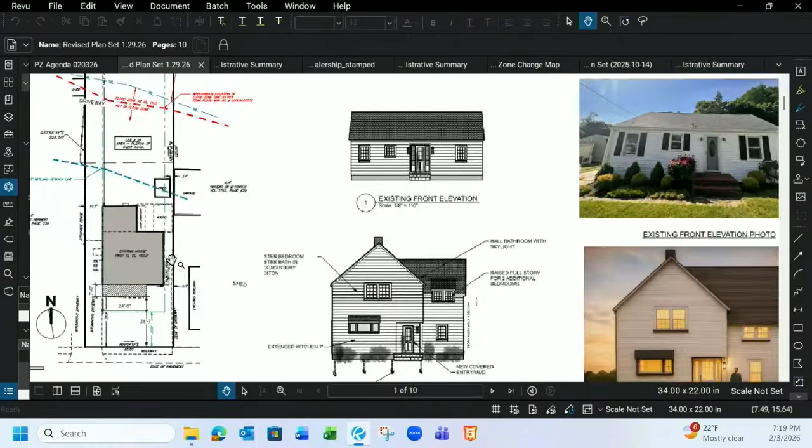So we're just looking for an extra couple square foot to account for that. All the plans are within the setbacks. The additional footprint would be approximately 170 square foot, so well within the 200 limit. Wetlands area should not be affected whatsoever. We're in fact going the opposite direction towards the front. The wetlands are in the back of the home. And yeah, we'd be more than happy to answer any questions.

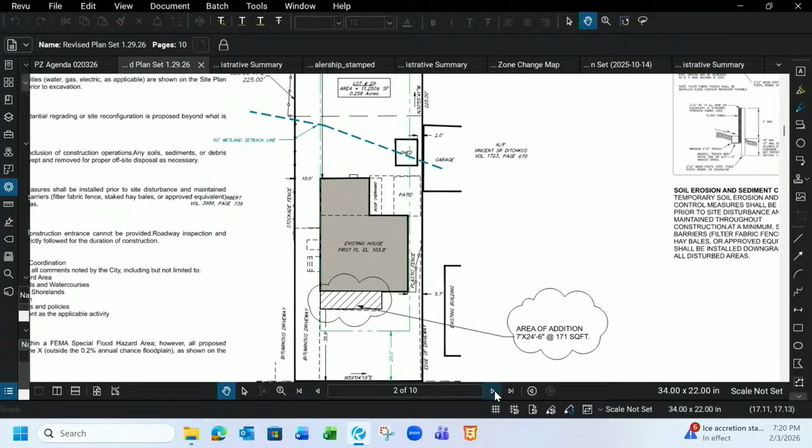Thank you. Are there any questions from the board? David?

The applicant is proposing a second-floor addition with a minor rear addition to an existing house. The proposed improvements triggered the need for a CAM review. The proposed height is 26 feet. The city engineer requires some clarifications for consistency with the CAM application, which can be made a condition of approval. No adverse impacts to coastal resources are anticipated. The project is zoning compliant.

Thank you. Any further questions from the board? Seeing none, I'd hear a motion. Mr. Chair, regarding 994 East Broadway as Zone R75, I move to approve with the conditions I will elucidate in a moment. The petition of Elijah Whitmore for a coastal area site plan review for a single-family dwelling on map 035, block 442, parcel 8A, of which Elijah Whitmore is the owner. The condition will be the applicant shall update the plans to satisfaction of the city engineer in accordance with the January 2026 letter of Mr. Bidlusky and limited, including but not limited to recommendations A through G in that letter.

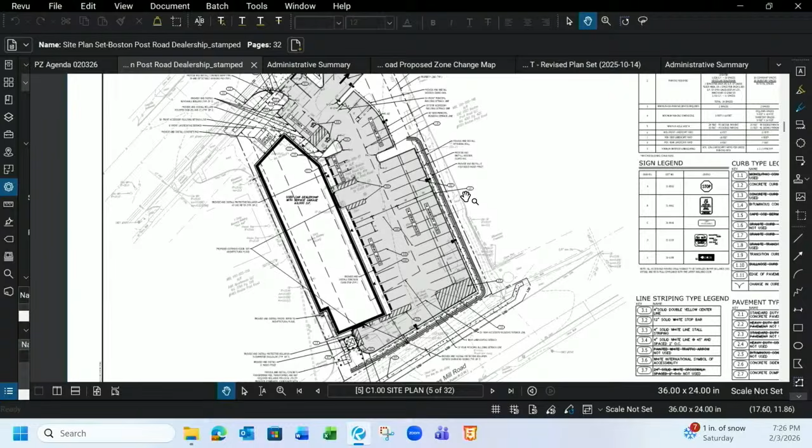Moving on to proposed, we do have the proposed plan up on the screen. The big item of note here is the proposed building is located to match the existing footprint of that existing building, matching on pretty much all sides. We made a couple minor tweaks to tighten it up a little bit, but it matches the outer extents on five sides, because there's one angled wall there.

The front setback for zoning is required as 50 feet; we match the 29 feet that the existing building had. The side requirement is 50 feet—on the west side, we match the existing, which was approximately 2 feet at the tightest, and it does taper a little bit. To the rear, the requirement is 25 feet; we're matching the existing of 31 feet.

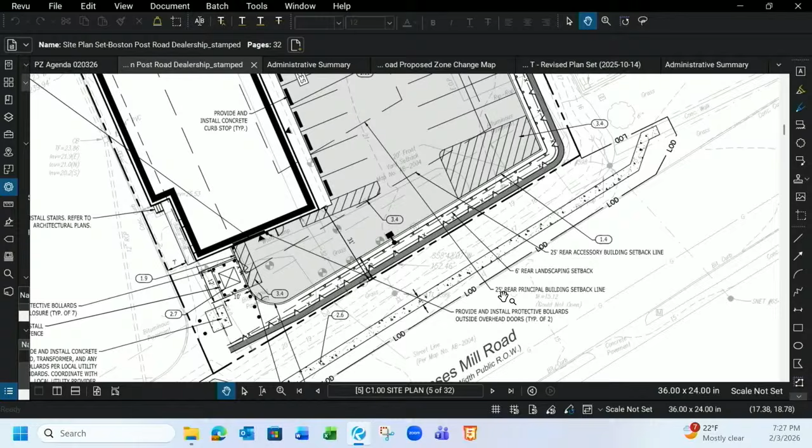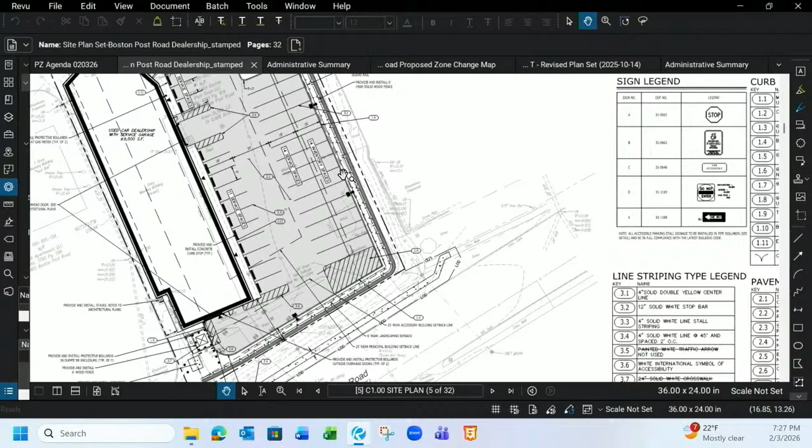For parking setbacks, we comply with the regulations on the front—required is 6, we're proposing 11, pulling that paving back a little bit. On the eastern side, the requirement is 10 feet; we're proposing to match the existing condition of 4 feet. On the rear, the requirement is 6 feet; we're proposing 7, getting a little bit of extra green space there.

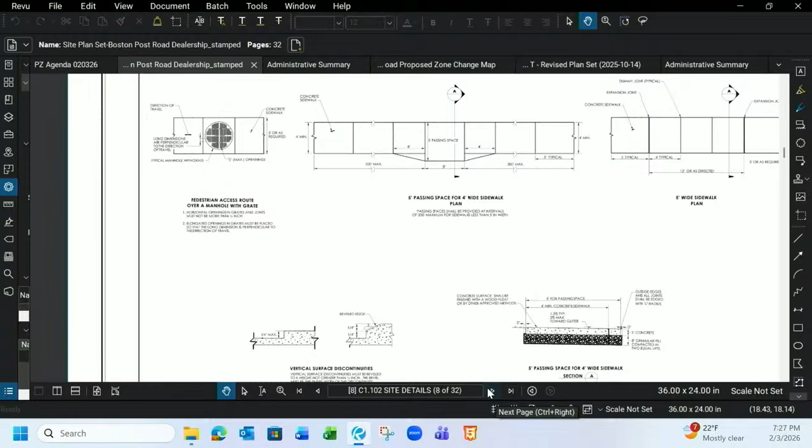The proposed building area is approximately 9,300 square feet. Roughly a quarter to a third of that will be dedicated towards office space to support the dealership function, the sales and business office piece. The remaining roughly 6,500 square feet or so will be dedicated to the service component of the building, with a total of 8 service bays expected.

For proposed parking, we are required to have 39 spaces by the regulations. We are proposing 39 customer spaces—public spaces to service the business between customers, employees, and that nature. That does include the required 2 ADA spaces as well.

We are proposing an additional 19 spaces for car inventory. Those spaces are slightly undersized at 2 feet shorter in the stall length, but they're inventory spaces. We understand that is something that has been done before in town at other dealerships, where inventory spaces are slightly undersized in some cases.

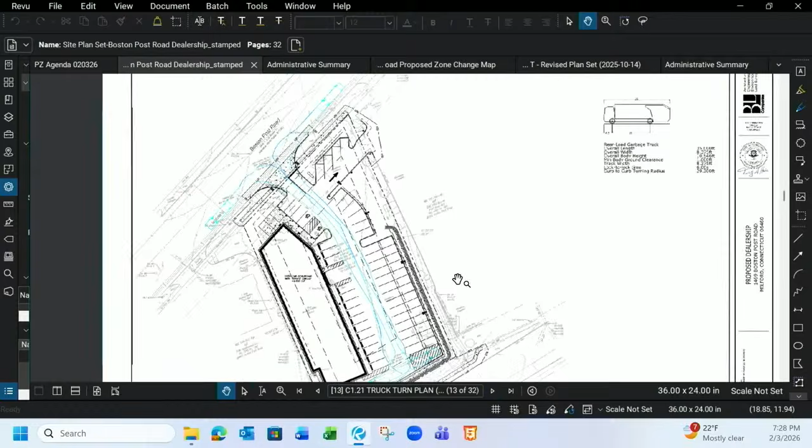For other improvements on the site, this property has no street sidewalks on the front or rear side. Both properties on either side have sidewalks on both sides. We are proposing to connect that gap and fill it in, both on the Boston Post Road side and the Rose's Mill side.

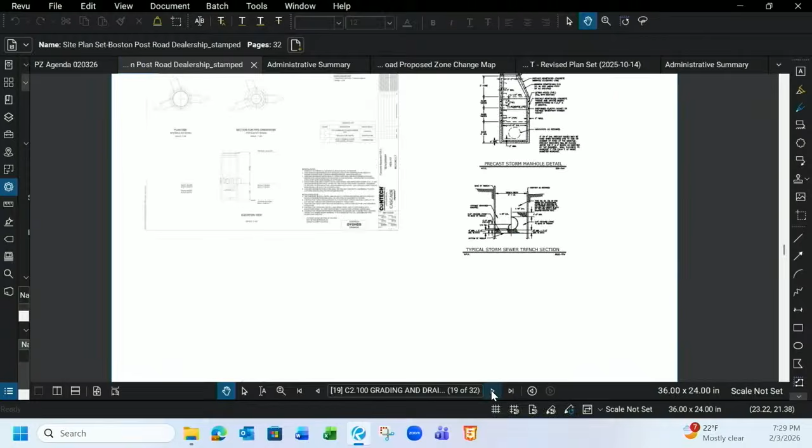We are proposing a number of new utility connections—pretty much everything coming in is going to be largely new services. This includes a new ductile iron water service for domestic use, a new fire service along with a new hydrant located at the new driveway upon the request of the fire department, a new 8-inch sanitary sewer service with oil water separator to provide treatment for floor drains expected inside the building, and new gas coming off of Boston Post Road. All those services—water, sewer, gas, and fire—are coming off Boston Post.

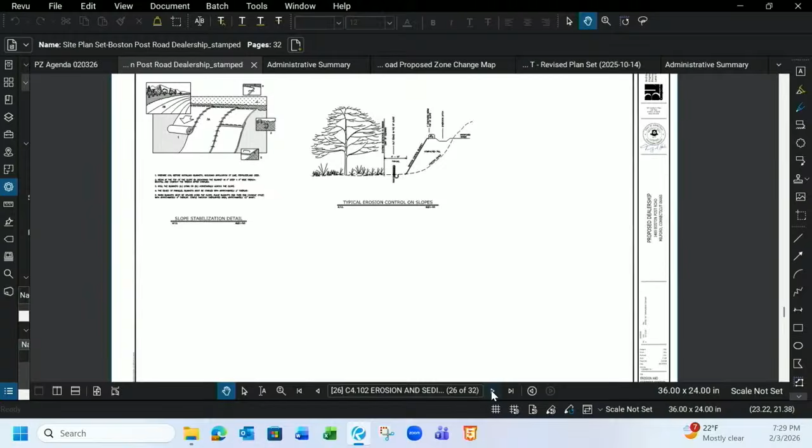Electric and tel data will be new, coming off of the Rose's Mill side of the site in the southwest corner.

For stormwater, we are proposing a comprehensive stormwater management system on site. There is no formal stormwater treatment today, so everything we're proposing is a significant improvement, but the proposed design does comply with the latest Connecticut stormwater management guidelines. The system consists of a series of catch basins in the parking lot, which will capture and provide initial treatment before flowing through hydrodynamic separators for the bulk of the treatment, and then discharge to an underground infiltration system, which will provide storage and infiltration for the large volume of stormwater we expect on the site.

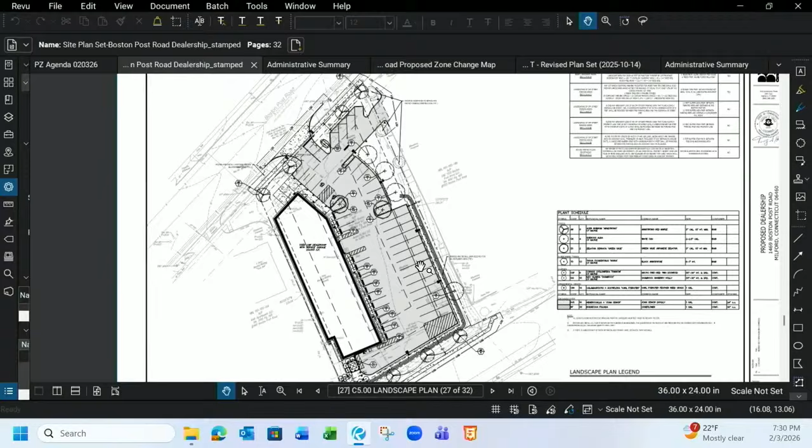In total, there were significant improvements in peak discharge rates for 4 out of the 5 points we analyzed. There's a reduction in excess of 50% of peak discharge, and the one that's lower than that is towards Boston Post Road, because we're adding the sidewalk. We were able to get a decrease there, but it's much smaller, in the order of a few percent, because of that added sidewalk. But again, it's a net reduction for the site as a whole for stormwater discharge.

We do also have a site lighting plan proposed. That was in the plan set. Maximum foot candles are roughly 4 on the site, so certainly not super bright, with very minimal to no spillage across property lines, around 0.1 foot candles.

And then finally, we do have a landscaping plan as well. The existing site is really devoid of vegetation. There's some grass, maybe a couple of shrubs here or there, but for the most part it's pretty bare. We are proposing a total of 14 large shade trees, 13 evergreens for some screening and variety, and about 21 shrubs, which we sprinkled around to try to spread them across the green strip across the frontage. There's some more green space and islands up in the northeast corner, and then more shrubs and trees along the Rose's Mill side, with some of the evergreens by the dumpster and transformer area to provide screening from that Rose's Mill side.

So in total, the proposed project includes redevelopment of what's currently a vacant lot that did experience a fire a number of years ago. The applicant is looking to redevelop that site and connect it with his existing operation next door at the Acura dealership. We are proposing a number of improvements with a reduction in impervious surfaces from existing, drastic improvements to stormwater management, and connecting the sidewalks on both frontages.

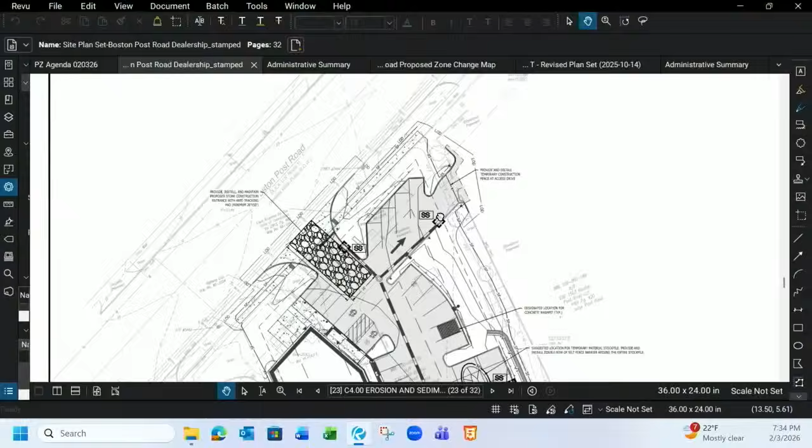I thought I heard you say Rose's Mill, but, so let's talk about the walkways.

I have no problem with the one on the Boston Post Road, but similar to the question I asked about the walls, do you have a site plan that would show where the sidewalks would be located? Yes, it's a little hard to see, but that zigzag where the mouse is going is the proposed sidewalk on the Rose's Mill side.

It does zigzag a bit closer to the curb line, but there's a grade change between this property and the street, so we have that zigzag for the elevation. Fine, thank you. The last question I have, and it's pertinent today, we wouldn't have asked this 3 or 4 years ago: where are you going to put the snow? If we get 15 inches, where are you going to put it given the apparent lack of any place to put snow on that property?

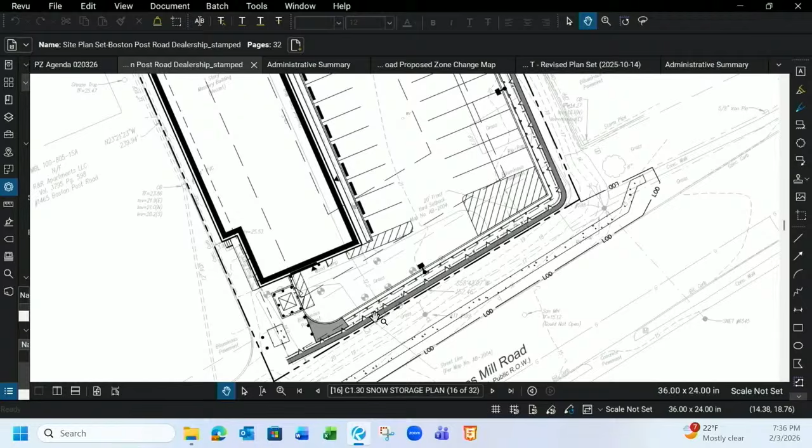Yes, it is a tighter property. We did provide a snow storage plan in the plan set, that's what's up on screen today. There are a couple areas where we can provide some snow storage. In the south corner there's very limited area - that hatched space in the southeast corner is primarily for delivery trucks or fire trucks for emergency access, so there might be a little snow storage there, but the primary areas will be more in the northeast corner of the site. Those darker shaded areas have some space for storage for smaller storms.

I'd also like to note we have 19 inventory or display parking spaces. In larger storm events, some of those could potentially be used for snow storage or short-term storage, but in large events like we just had, snow would need to be trucked off-site. Thank you very much. Thank you.

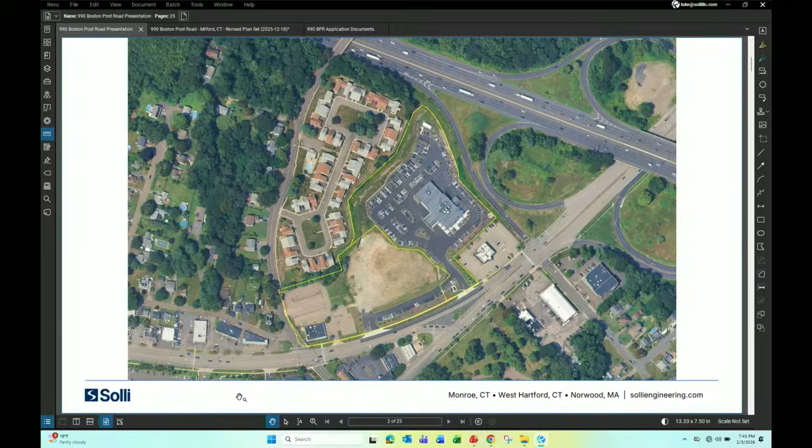The reason we're proposing this zone change is we're looking to form two separate legal parcels for purposes of financing with the bank and such. The Genesis is already developed, so they're trying to separate the funding between those pieces to make it easier for construction loans. So in order to make a complying lot, we needed to do the zone change and a lot line revision for that to occur.

However, in terms of the setbacks, it does conform to the bulk requirements for both zones for what it's worth - that would be for lot area, lot width, lot depth, front yard setback, building heights, building coverage, and FAR. So the real reason for the zone change is to take advantage of the reduction in the side yard setback for the interior lot line.

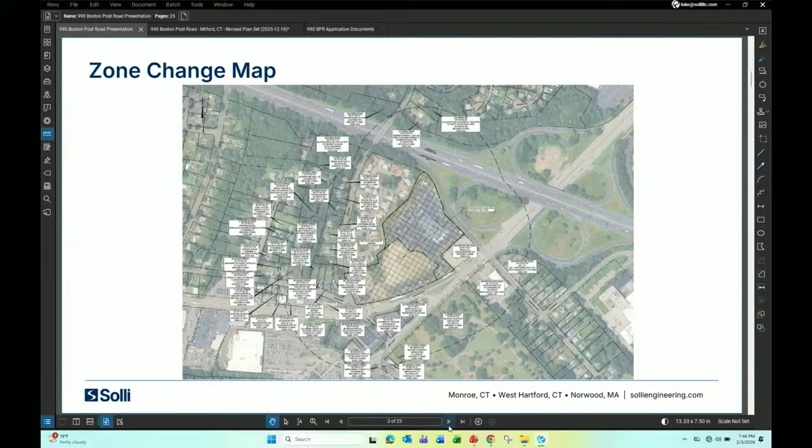Just proof that we posted the zone change signs as required. We also mailed out the abutters notifications to abutters within 500 feet, and we did file the applicable maps in the clerk's office per the zoning regulations.

So now to the lot line revision portion of the application. The proposed lot line - I'll try to depict this as easily as I can.

The existing lot line, where my mouse is, the grayed out area, separates 990 on the west from 1040 and 1052 on the east side. We're proposing to relocate that line about 200 feet to the east on the top, and it bows out to about 400 feet on the bottom.

The reasoning for the lot line relocation is so the Genesis can function as its own separate parcel, and the grocer and strip retail would also function as their own separate parcel. This would result in a compliant lot in terms of bulk setbacks, parking setbacks, and landscaping setbacks.

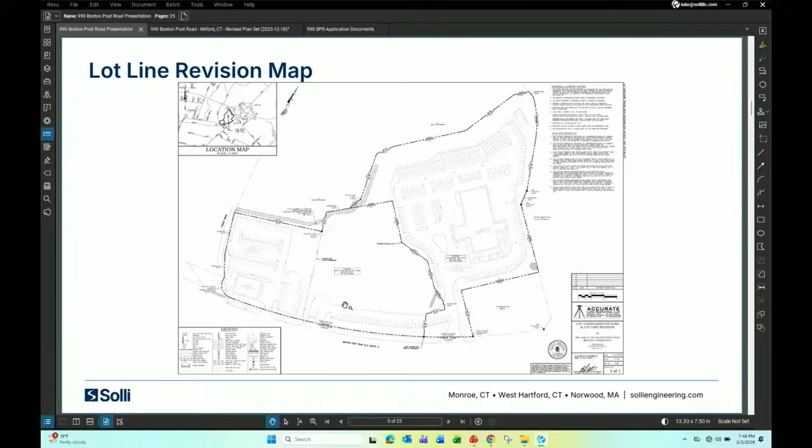For our overall site plan, the project consists of the construction of an 11,400 square foot strip retail building on the bottom left side. We envision it as a mix of probably 3 tenants, a restaurant and 2 retail tenants.

That'll replace the former Hooters building in the southwest corner. And then a standalone 26,181 square foot grocery building will be in the existing gravel parking lot, which used to be the old Howard Johnson's. The grocer will sit between the strip retail proposed on the west and the Genesis located on the east side. The site is in conformance with all bulk zoning and parking requirements.

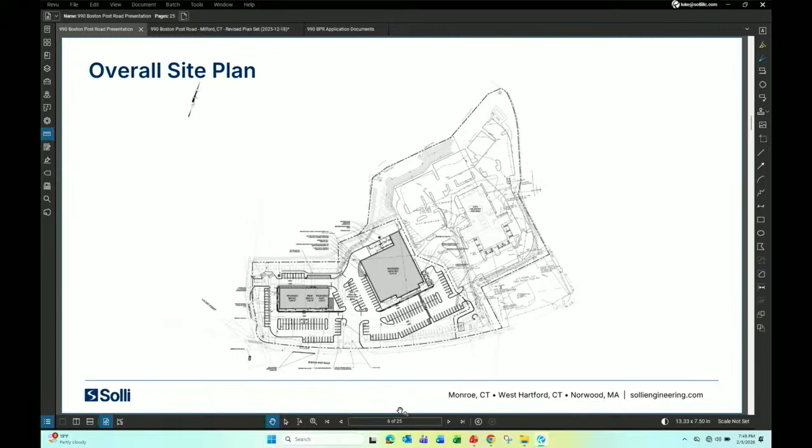It's a little easier to see with color here. In terms of site access, to orient everybody, this is the grocer in the middle, and the strip retail building on the left side. The existing right-in, right-out driveway associated with the Genesis dealership will remain as is.

The existing full movement driveway that splits the difference between these, running along the property line as it exists now, will remain as well. There was an existing curb cut here associated with the Hooters, which is covered up now. That's going to be removed for traffic safety reasons, to consolidate access and improve movements along Boston Post Road. The site access along Forest Road will be relocated about 40 feet to the north, so we can run a straight drive aisle behind the building.

All 3 building pads—the strip building, the grocer, and the Genesis—will have interconnectivity between them. There's a connection point between the grocer and the Genesis, and a connection throughout the middle of the property, so everyone will have access to the traffic signal at the intersection of Forest Road and Boston Post Road.

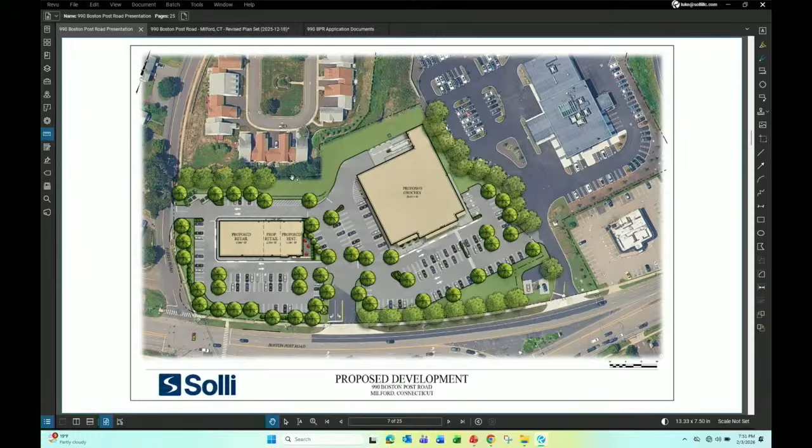Just for what it's worth, it might be a little easier to tell on my black and white site plan. The existing limits of the Hooters parking lot adjacent to the residential area to our north is about 10 feet off the property line right now. There's a screen fence and some large evergreens screening that. But as part of our proposed redevelopment, we're going to be relocating that parking lot 25 feet further south, further away from the residences that abut us to the north.

In addition, the parking lot is fairly high, with grades going up to about elevation 52. We're going to be lowering the whole parking lot between 3 to 10 feet below grade there. So not only are we tripling that buffer, we're also lowering the parking lot so it's sitting a good 15 to 20 feet lower. There'll be some walls with a screen fence on top as well. I do have a picture of the buffer as it exists today, and that's going to remain as part of the redevelopment.

The area shown here, exclusive of the Genesis dealership, requires 151 parking spaces per code, and we're proposing a total of 193 parking spaces, mostly because the tenant has their own requirements we need to fulfill for lease negotiations. It does meet the requirement for the total number of ADA accessible spaces, and there's also 20 EV-ready parking spaces, which is 10% of the total required by state code.

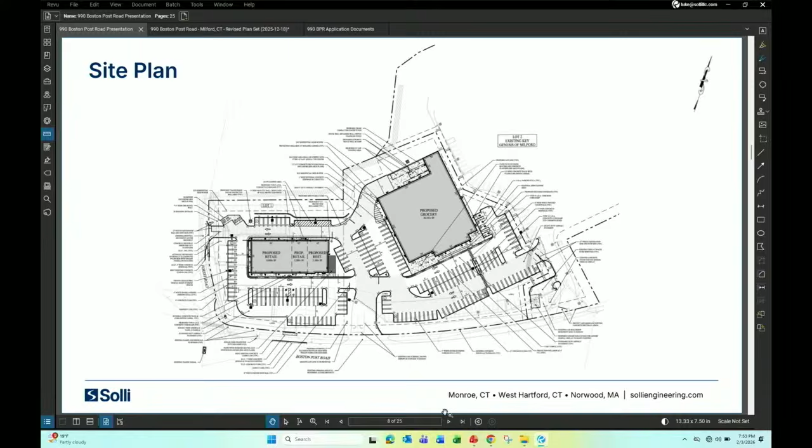We did submit a truck turning template. This is a view of the full-size tractor trailers entering the site. You can see they can come in safely off of Boston Post Road, proceed to the rear into the loading docks behind the building, and then they can proceed out through the access on Forest Road for the signal. They would also be able to exit via the driveway in the middle, but we figured likely they'd be using that signalized access that's over there.

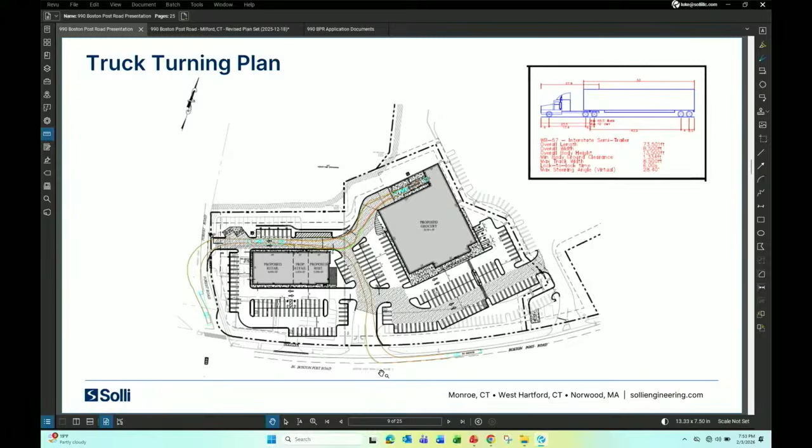We also submitted a fire truck turning template to the fire marshal for review as part of his response to the comments, and he did give us some fire lane signage, striping, and some circulation comments, but we were able to address that, and I believe we received a sign-off letter on January 13th from the fire marshal.

In terms of the grading and drainage, it was designed in compliance with local regulations, along with the 2024 Connecticut Stormwater Quality Manual, and also the 2000 Connecticut DOT Drainage Manual. We always design our projects to mimic existing drainage conditions as best as we can.

Generally speaking, runoff from all the impervious surfaces, that would be building roofs and the parking lots, will be collected by a series of catch basins and drainage pipes. All that runoff will be treated by hydrodynamic separators before flowing to one of 3 new underground detention systems before it outlets from the site.

More specifically, the west side of the development, which is where the strip retail building will be located, everything will be collected. There is a hydrodynamic separator right over here, flows to, if you could see this little grid, a series of underground detention chambers that'll reduce the amount of runoff leaving the site, and ultimately will connect into the system at the southwest corner of the property in Forest Road.

And then for the larger portion, the grocer, you could see 2 larger underground detention systems, one in front of the store, one on the side of the store. There's also a large one that was constructed under the parking lot. So there's going to be 3 underground detention systems collecting the runoff from the grocer portion of the project, attenuating and treating the water, attenuating the flows, and ultimately that flows off-site to Genesis and then to a drainage ditch along the highway.

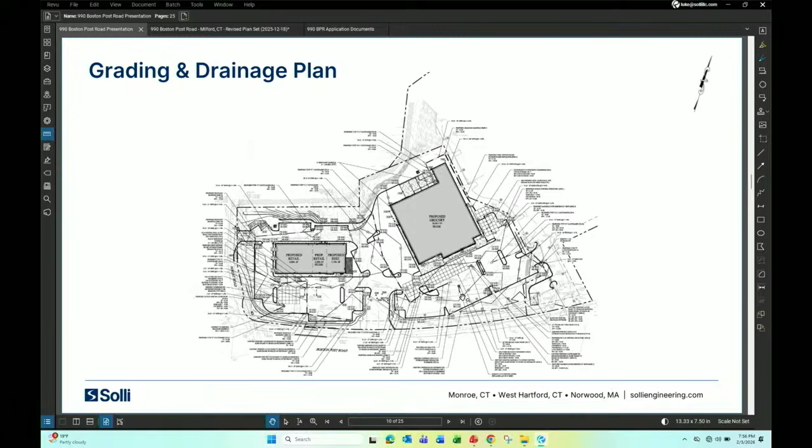There's a construction entrance proposed for construction-related traffic. There are stockpile areas, inlet protection proposed for the existing catch basins and ultimately the proposed catch basins as well, so that soils don't migrate into the system and off-site. And there'll be silt fence installed on the low areas of the excavation, again, so no soil migrates off the property.

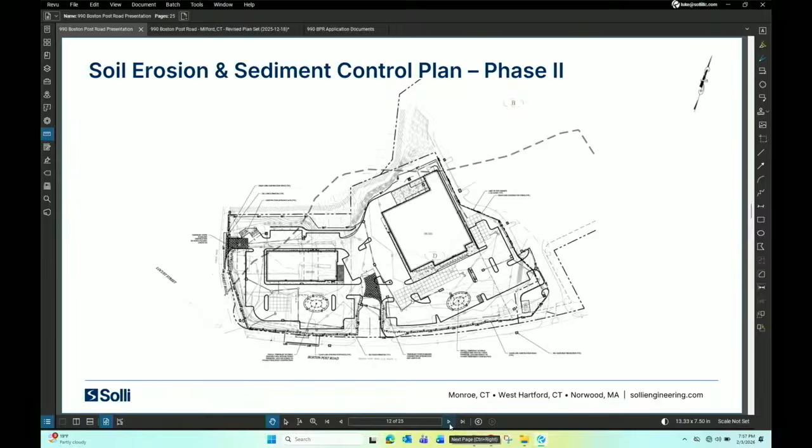Okay, utility plans. The site is serviced by public utilities under existing conditions. There will be separate services for water, sewer, gas, electric, and telecom for each of the buildings.

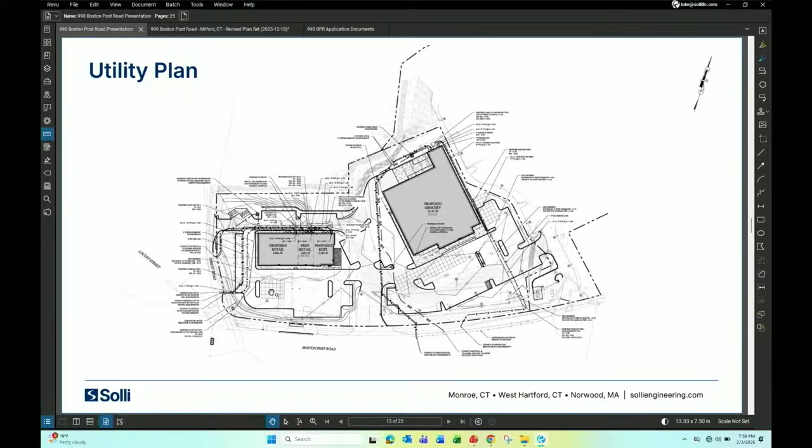We received an approval letter for our sewer flows from the Sewer Commission on December 17th, 2025. There is a bakery deli use associated with the grocer that'll flow through a grease trap to collect grease before it enters the sewer system downstream. The restaurant will also have its own separate 2,000-gallon grease trap for grease waste before combining with the on-site domestic sewer.

In terms of landscaping, we proposed a detailed landscaping plan. The goal is drought-resistant plantings to the greatest extent practical. 80% of the trees are native species, and no invasive species are proposed. The plan complies with regulations regarding the number of plants required, the internal square footage of landscaping, and buffer strips along the side and rear property lines.

For some of the steeper slopes we're grading out, we have a specialized erosion sediment control mix to stabilize those areas, and the remaining areas will be vegetated.

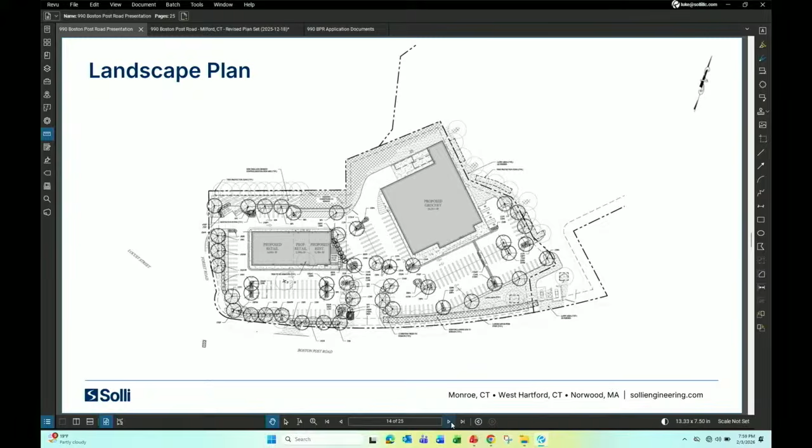So this is the buffer in question that is to remain, and I'll try to help everybody visualize it. This is the rear of the existing Hooters parking lot. You can see the approximate limits of pavement here where my mouse is, and we're going to be moving this limit of pavement about 25 feet to the south, somewhere in the middle of the existing drive aisle.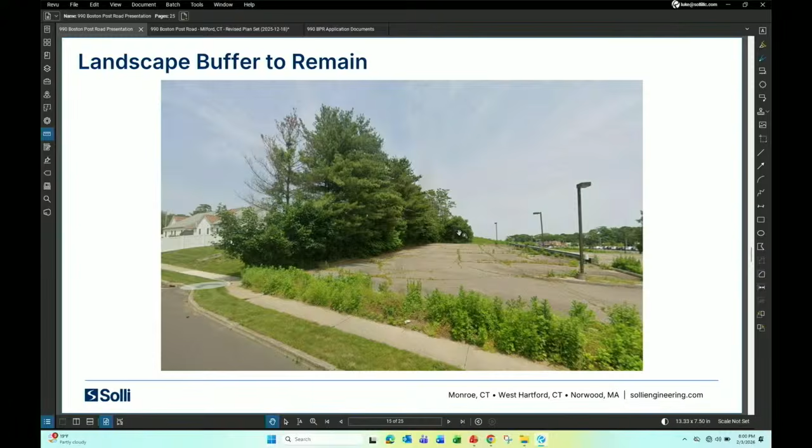Coming from the forefront of the page to the rear, you can see this drive aisle gets higher by about 10 feet as you travel east, but this will be reduced to be significantly lower than the condos located behind us. So the building and site should be naturally screened based on the grading plan and vegetated plantings, and the existing screen fence will also remain as part of the project.

In terms of lighting, we design all our sites with energy efficient LED site lighting fixtures, dark sky compliant. All fixtures are recessed, helping reduce glare and ensuring no light spillover over the property line. These poles are about 18 feet high, but since the parking lot is set so far below the residents to the north, the top of those poles will most likely be at or below eye level elevation compared to the residences above.

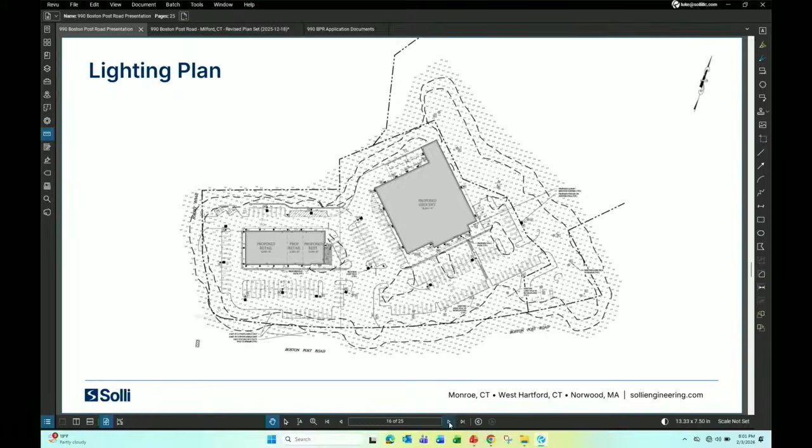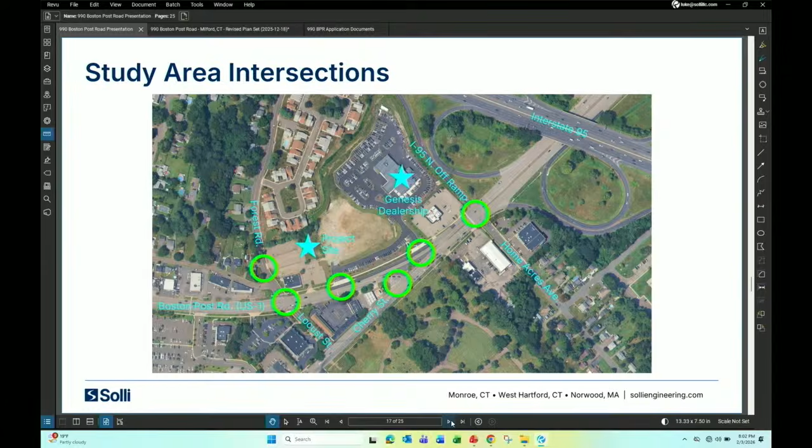We did the counts in April 2025 while school was in session, and projected those to the 2027 build year. We believe, if all goes well, the project should be open sometime next year, so we applied a 2% growth rate for natural increase in traffic along the corridor.

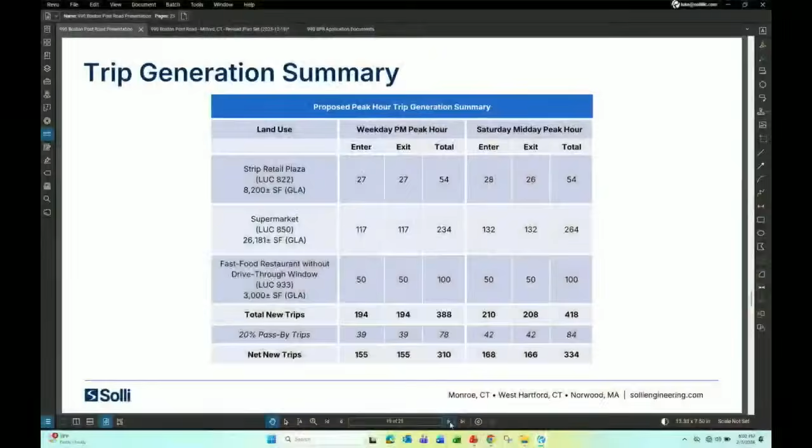We prepared a trip generation summary as part of our traffic study. In total, during the weekday evening peak hour, we expect about 310 new trips to the development—that's not 310 in and 310 out, that's 155 in and 155 out, based on the ITE manual. On Saturday, it's a bit larger, about 330 total trips in the peak hour, about 168 in and 166 out.

We ran a capacity analysis for the existing, no build, and build conditions. Overall, the intersections are going to maintain acceptable levels of service. Generally, any increasing delay is within 3 seconds or so, give or take, so not a very measurable impact on levels of service or delay at the intersections. In terms of car queues, most intersection approaches will only experience an increase of 1 to 2 vehicles, with maybe one location seeing an increase of 3 vehicle lengths or so.

The traffic study was reviewed and approved by the Police Commission on November 3rd, if my dates are correct. We also had to submit to OSTA, the Office of State Traffic Administration, because this development has over 200 parking spaces. OSTA review is ongoing—they completed the drainage portion but are still reviewing traffic. Since Route 1 is under state jurisdiction, they'll tell us if we need any mitigation or changes to the geometric layout. Subsequent to OSTA review, any physical work in the right-of-way requires an encroachment permit from the DOT District 3 office as well.

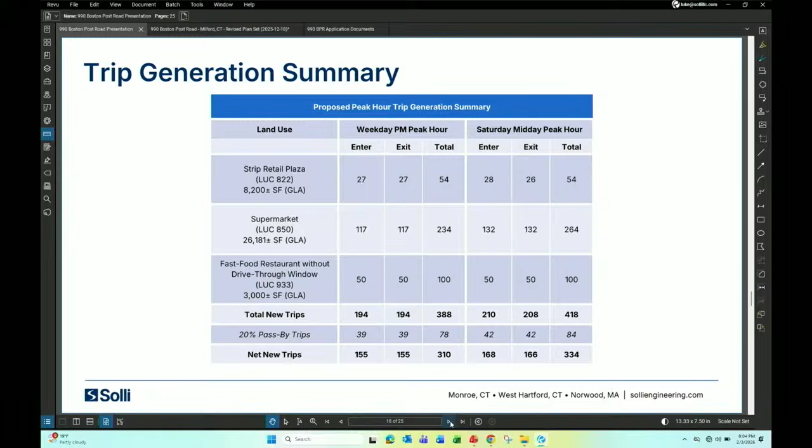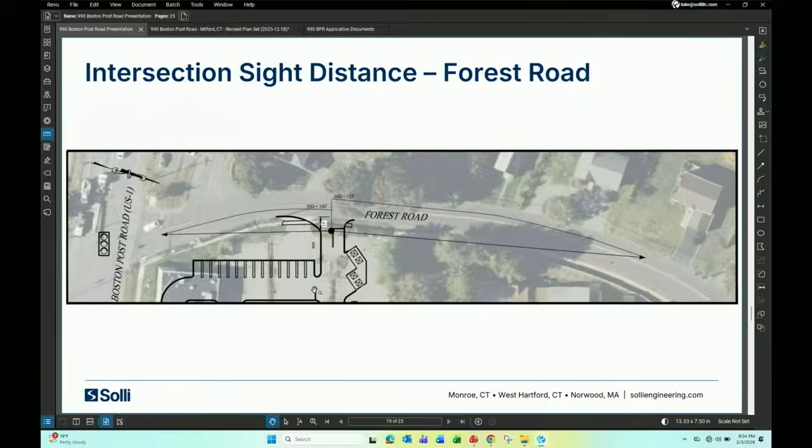Just quickly, in terms of intersection sight distance, here's a plan showing the required sight distances along Forest Road. Essentially, the driveway is in a similar location, but there is adequate sight distance for the driveway along Forest Road. And also, it's an existing condition, but for what it's worth, the site frontage along Boston Post Road is clear, and the sight distances are all contained basically within the pavement. So no issues with the sight distances, but again, they've been reviewed by the Police Commission, and they'll also be reviewed by OSTA as part of their review.

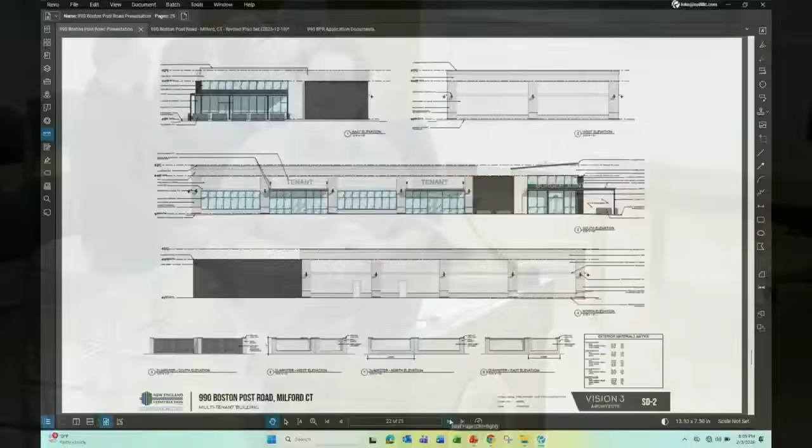Just a view of what the facades, we envision the facades to look like. Light color palette, mostly whites, light grays, a lot of windows along the front for natural light, but no windows or anything on the rear abutting what would be facing the residential, so there shouldn't be any light emanating from the building towards the residential development located behind us. And we also have a matching color scheme for our dumpster enclosures, shown on the bottom here.

Mr. Sulkus did have some initial comments about the materials to be used. You'd like to see more natural materials per your regs, so we've gone and updated the renderings. So what you see here are the updated renderings. A lot of brick veneer, fiber cement, lap siding. There's some metal siding over here on the east side, the east facade of the building, along where the proposed restaurant is located.

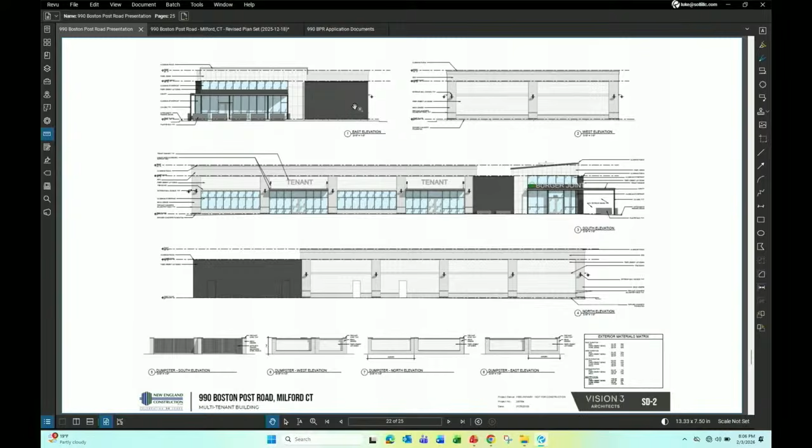Just quickly, floor plan for the proposed grocer. Again, 26,181 square feet, a single-story building. There is a small outdoor seating area. They have a little cafe, and we believe they'll have a cafe with some offerings. There'll be protection bollards in front of the store. You can see all these little dots down here, so there'll be vehicular protection for the front of the store.

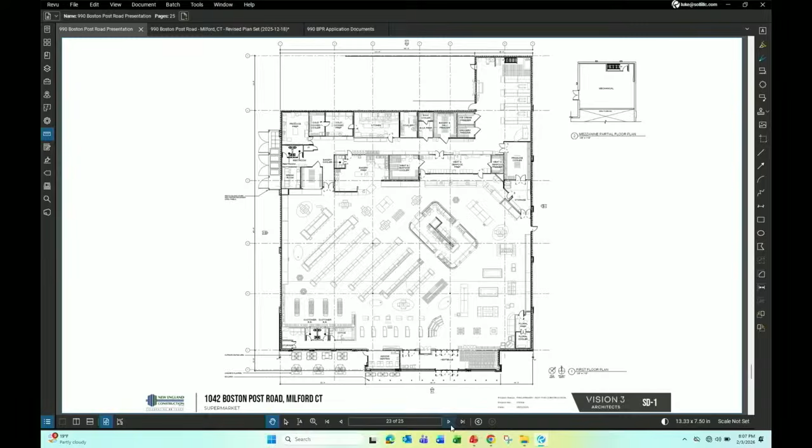And then the color scheme, another light gray, beige kind of color scheme along the sides and the rear of the building, and then the front of the building has a kind of a green logo facade, if you will. But again, a lot of windows to let natural light in along the front, but no windows proposed along the sides or the rear to prevent any light trespass to the neighbors to our north.

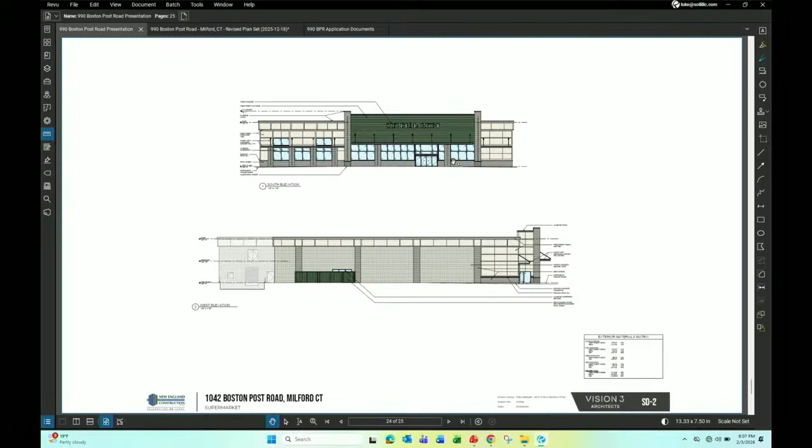So with that, I'm happy to answer any questions. I know it threw a lot at everybody, but happy to answer any questions.

Thank you. That was a very thorough and interesting presentation. Thank you for that. Mr. Anderson. Good evening, Mr. Morrow. Yes.

You answered a question I was going to ask you about the outdoor patio. I was wondering what that structure was on the east side of the retail.

For the grocer, how many bays will service the grocery store? Just one truck, in terms of a truck well? So the truck is backing into the space? Correct. Okay, 75 foot wide, and it's got a wall the whole length. Yep. And it is, for what it's worth, set, there's a cliff that's about 25 to 30 feet high behind us, so it's set a good 30 to 40 feet lower than the residential.

That's there's a buffer above us. There's a buffer, yep. Right, I am familiar with the site. Okay, could you, maybe I missed this, could you detail the landscaping plan? Sure.

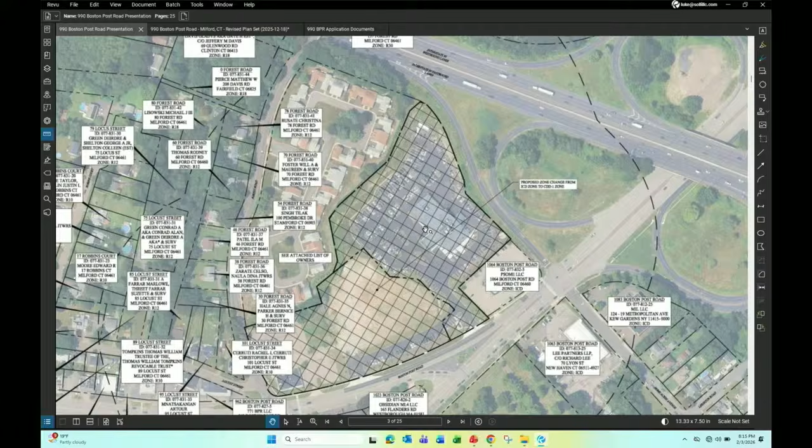Okay, why do you need the change for the Genesis property? Because it's already been developed. In order to allow for the lot split of the zones in terms of bank funding, there's a certain building and landscaping setback requirement which we cannot meet without a zone change. Essentially, without the zone change, the project isn't viable because we need a reduction in the side yard setback. Okay, and then the last question I have is on the lot line adjustment — does that apply to all three of the parcels or only 1040 and 1052? It applies to, I guess, two.

So this is 990, this square on the left side. Everything from, if you could trace my mouse, all the way over and then all the way up to the back, that's one property known as 1040 and 1052 Boston Post Road. So we would be relocating the existing property line so that 1052 is its own separate property, and then 990 and 1040 would be their own separate property.

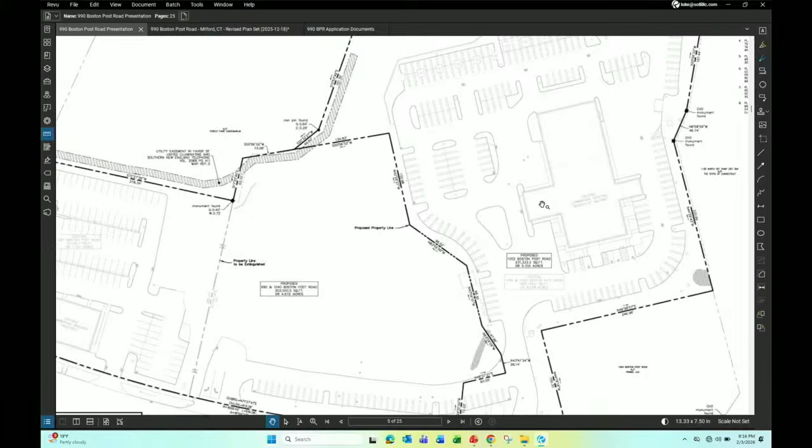Sorry, I imagine it was confusing to me too from the start. So it appears the lot line adjustment you're seeking is between 1040 and 1052. That's correct. I have no further questions at this point, Mr. Chair.

Thank you. Any questions before we go to David and then to open the public hearing? David?

The applicant is proposing to develop a shopping plaza consisting of a grocery store, restaurant, and retail space on the site of the former Hooters restaurant and an undeveloped portion of a property associated with the Genesis car dealership. The application consists of three parts. First, a proposed zone change from ICD to CDD1. The change allows for more advantageous setbacks, which improves site plan configurations.

Second, a lot line adjustment is proposed to allow for a better site plan layout and lot configuration where the proposed shopping plaza and Genesis dealer meet. The configuration keeps both lots zoning compliant. The third application is for the special permit under 3.16.2.14 for the development of the shopping center and restaurant use.

151 parking spaces are required, with the applicant providing 193, including 20 EV charging spots. The project as proposed is zoning compliant. Thank you.

Good, Mr. Sadi? Mr. Chair, through you to Mr. Sulkus. In your first page of the administrative summary form, you refer to the CDD1 and the language you use that allows for more advantageous setbacks, which improves site plan configurations. How does that make any difference to a property that's already been developed and we approved some time ago?

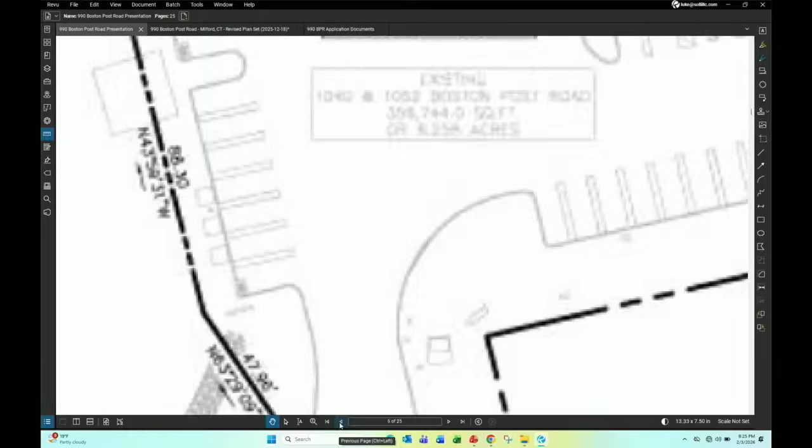Those are the 3 or 4 EV chargers that were mentioned. Those will remain as part of the development on the Genesis parcel. It's a little bit too blurry here, but hold on, I think I have a clearer version.

So these are the existing chargers here. We are going to, although not depicted here, likely put some EV chargers also along this strip here to feed off of. They're level 3 chargers, so the amount of draw they need requires its own transformer. As I understand from talking with Jeff Merriam, there's additional capacity.

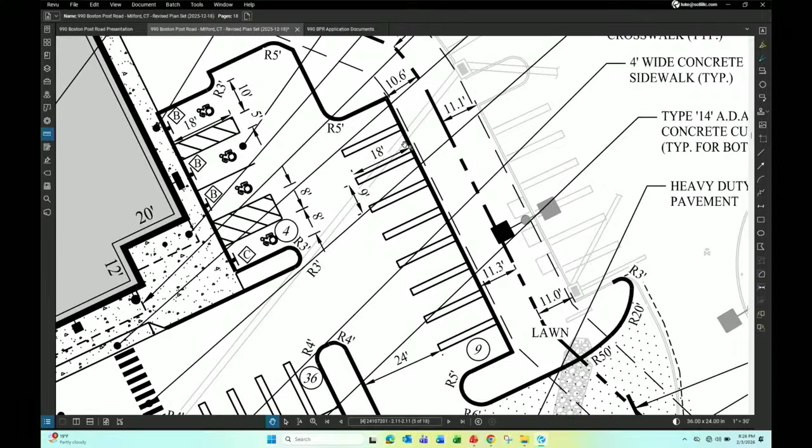So we're going to try to put some higher speed level 3 chargers, which I believe you can get a full charge in like a half an hour, something like that. As you can imagine, they're expensive. UI needs to have the infrastructure in place to also support that.

I got an email today. They're trying to help us coordinate to see what the loads might be. So while not set in stone, the goal is to try to get some more EV fast chargers on the adjacent, the opposite side of that landscaping island.

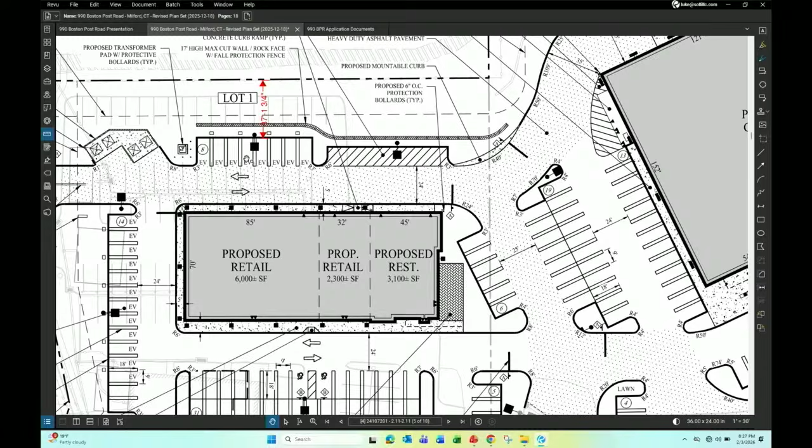And then also, there would be some EV parking spaces located along this side of the building and the rear of the building at the strip retail as well. So that should answer that.

In terms of solar panels, unfortunately not my decision, but I can certainly bring that recommendation back and see if it's something that would be viable. I'm not sure if the roof is already supported for those type of loads, but it's certainly something we can consider, and I can have a conversation with the landlord and the contractor about that.

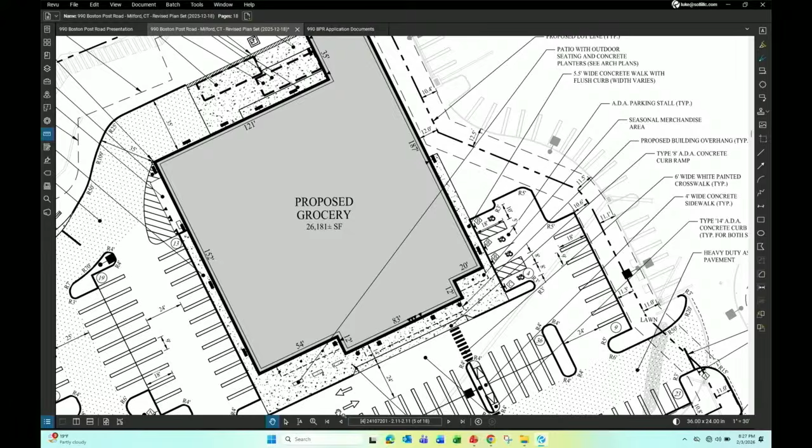In terms of the traffic that's located along Forest Road, with the full movement curb cut on Boston Post Road, there is the ability for cars using Genesis, the grocer, and the strip retail to have immediate access to Boston Post Road. One of the reasons we're proposing to maintain it in that configuration is so we don't have to force everybody out to Forest Road.

As a matter of the delivery vehicles for Genesis coming in and out, this is a right-in, right-out driveway, so in order for them to get back to the highway, they need to loop around and make the left turn out here as well. That's why we're proposing to leave that full movement access there.

And then also, for busier times, a connection over here is proposed, generally a little bit further north than it was—about 40 feet further north than in the existing condition. For busier times where it may be difficult to find a gap on Boston Post Road, there's the ability to get out to the signal and take the left.

Based on the traffic analysis, there's no required mitigation needed, such as adding turning lanes, restriping, or widening, but through the process with the DOT, we can certainly ask if there's an ability to modify those signal timings to try to give some additional green time to both Locust and Forest and get more throughput of vehicles.

That's ultimately not up to me, it would be up to the DOT, but generally speaking, if we're offering to help fix an existing situation, more often than not DOT will try to work with us, so that's something I could commit to. But because that signal is owned, operated, and maintained by DOT, they have the final say—it's certainly something we can bring to their attention and see if we can extend the green time for people coming off of Forest Road.

Could you commit to site policy and signage, no trucks or tractor trailer type trucks out onto Forest Road? We can put signage in, with the caveat that it has to be the existing curb cuts, so they shouldn't change. But they ultimately have to be reviewed and approved by DOT again because we're adding square footage. So long as that curb cut remains as is, we can certainly commit to that.

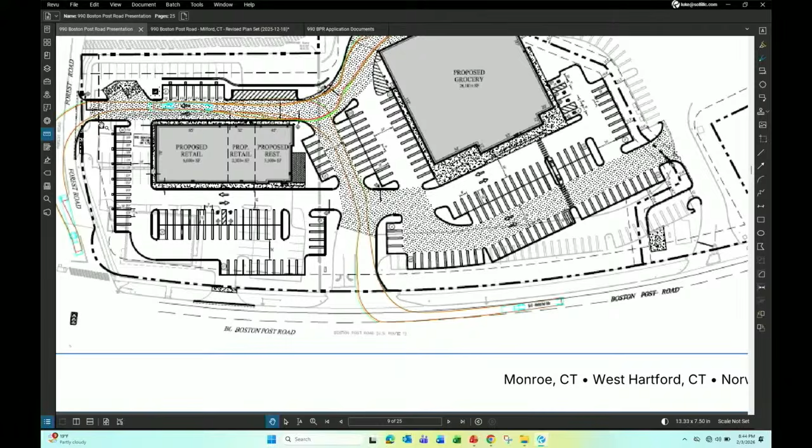Other than some signage, any thoughts? I don't think we can go to a reduced size drive aisle over there, because we wouldn't be zoning compliant. And the drive aisles are designed not just for people visiting the site, but for emergency vehicles and fire access.

Well, we do have 3 other curb cuts, but... Okay, these are just questions. Go ahead, Mr. Sadie, thank you again.

Dealing with the thorny issue, if we grant a site plan special permit, but the condition is that there be no access to Forest Road, does that make your plan not viable? Most likely, yes. The reason is that once it gets reviewed, although the state doesn't have jurisdiction on Forest Road, there's always a preference by the state to have access when feasible to a side street that's also serviced by a light. That's what they're going to prefer.

So while the commission may have an opinion one way, the state may have an opinion another way, and we haven't gotten through the full conversation with them yet. It's possible they may say they prefer the access on Forest Road over Boston Post Road. So I'm kind of stuck in the middle of different parties wanting things done a specific way, but ultimately I think that access on Forest Road needs to stay.

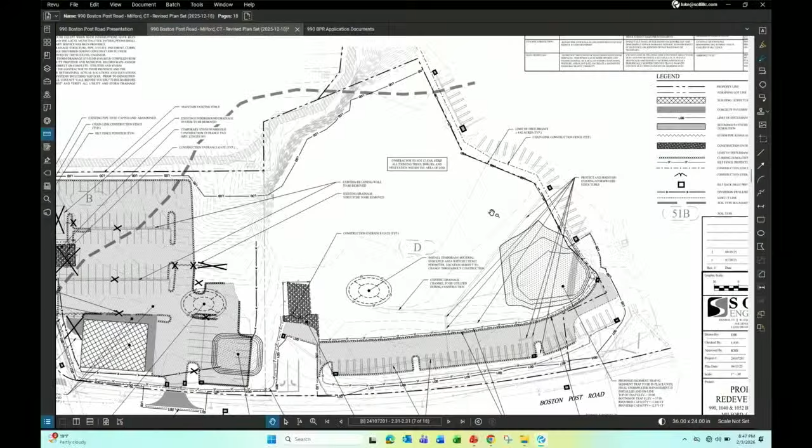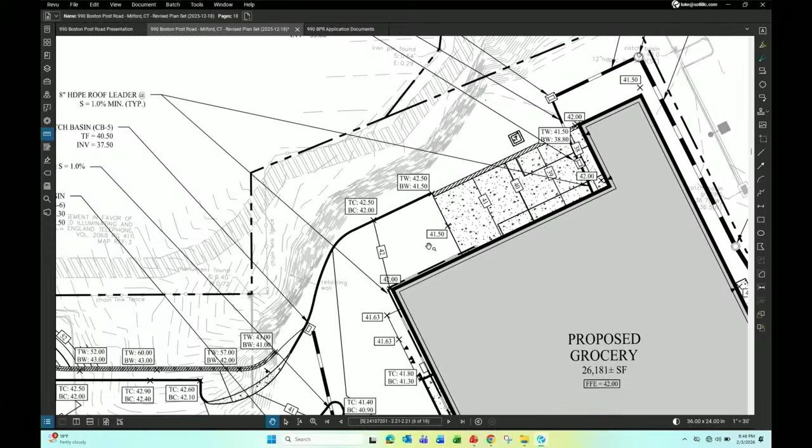So that grade back there, how many feet below the average grade of the residential development is it? Bear with me one second. There's so many contours, I'm just trying to figure out. At the top, where the loading dock is, elevation 42... you can see these contours are so tight, but hold on, 5, 10, 15, 20, 25. It's about 30 feet lower.

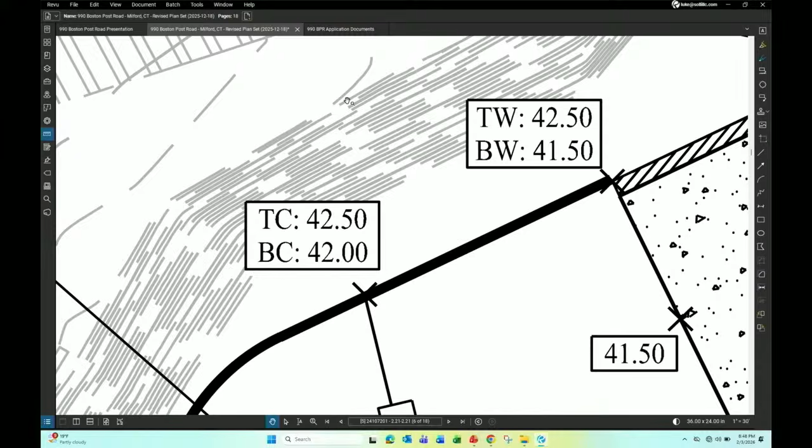So the top of a truck is about 13 feet high, so the top of the truck should sit a good 15 feet below. That will do some sound mitigation. There's sound mitigation, and I believe there's also a screen fence there as well.

Can we, as a condition, require best practice sound mitigation on that screen? Sure. Also, the dock is recessed even further. It starts at grade, but there's another 4-foot wall down below when you get to the dock itself, so there's another mechanism for sound mitigation behind that as well.

We wouldn't expect larger trailers to service the smaller retail building. On occasion they may, but normally we see smaller box truck type vehicles. We gave them a loading area here so they can pull parallel to the building, trying to avoid backup maneuvers to the greatest extent we can. They would be able to loop around, with a smaller box truck pulling to the loading area in the rear, looping around the building, and getting back out as well.

So in theory, they should be able to do their deliveries without any backup maneuvers. You could do signage and striping. Correct, so that if somebody didn't see the sign, the striping would direct them. The only vehicle behind the grocery store would be a delivery truck. So we want to direct them to the Post Road. Understood, thank you.